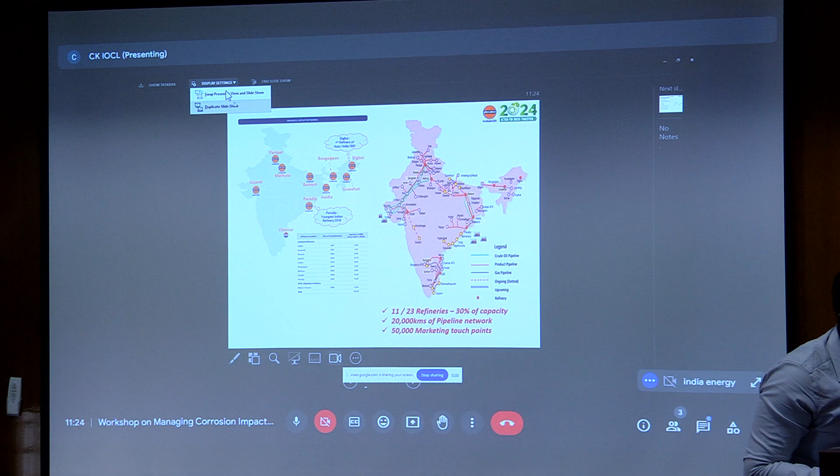Kannan, sorry to bother you, can you make it full screen at your side? It is on full screen only. From the display setting, please go to display setting, on the top left side, second one, it's a display setting. Can you make it full screen? Duplicate. Okay, is it okay now?

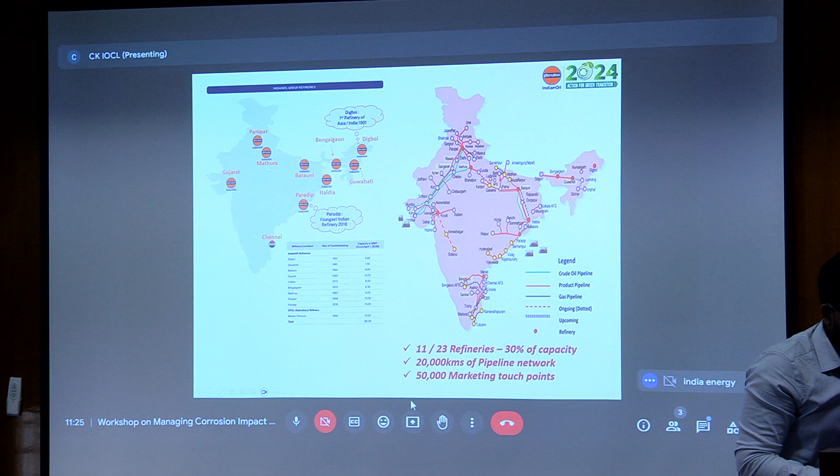Great, now you can also hide it, the one at the bottom you see there. Oh, it's gone. Okay, please go back again. Ignore that. Is it okay now, sir? Thank you, yeah, thank you.

We are the largest refiners in the country, faced with the challenge of operating refineries as old as 120 years. We have a refinery at Digboi, which was installed in 1901, and the latest one in 2016. That is the kind of diverse infrastructure we need to maintain.

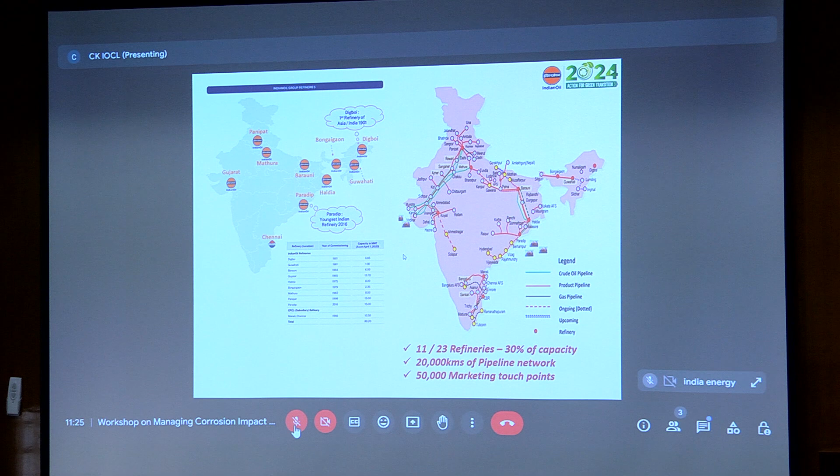At the same time, we also have the largest length of liquid pipelines, underground buried pipelines, almost 20,000 kilometers running crisscross across the country.

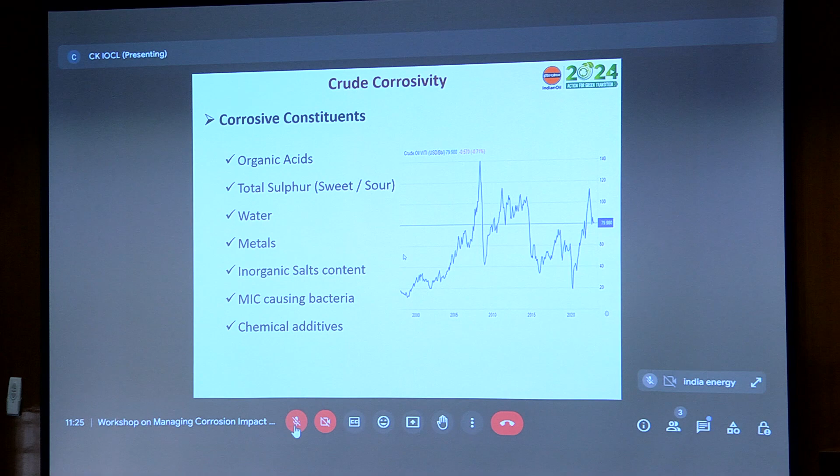As you all know, crude corrosivity depends mainly on organic acids and the amount of sulfur present, along with water and other inorganic salts that come with the crude, which poses a challenge for the downstream oil refining industry, either during transportation through pipelines or during processing in refineries.

You will appreciate that there is a drastic change in crude chemistry, especially the composition for which the infrastructure was originally designed versus the currently prevailing composition. This is mainly with respect to the high total acid number of the crudes as well as high sulfur content. The transportability in existing pipelines suffers because of the very high sulfur crude we tend to transport in recent times. So the question here is the compatibility of existing materials with this change in crude chemistry.

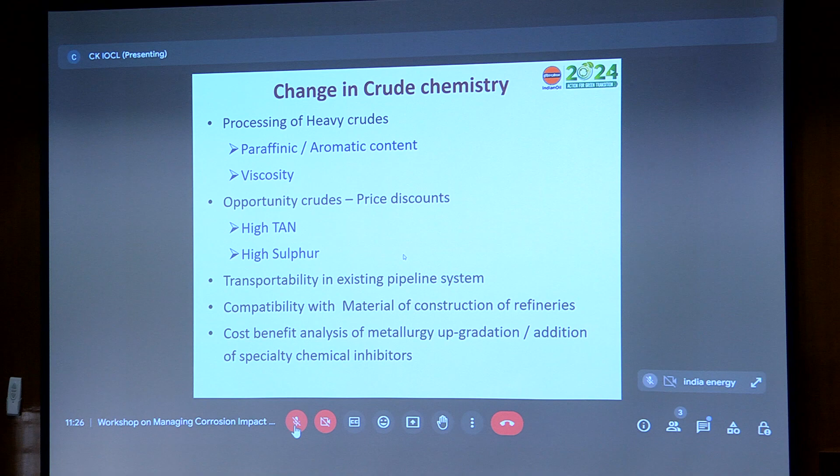On the other side, there are a lot of bottom-of-the-barrel technologies demanded to derive value out of each drop of crude oil we process, resulting in increased temperature, pressure, and severity of processing in the refinery infrastructure.

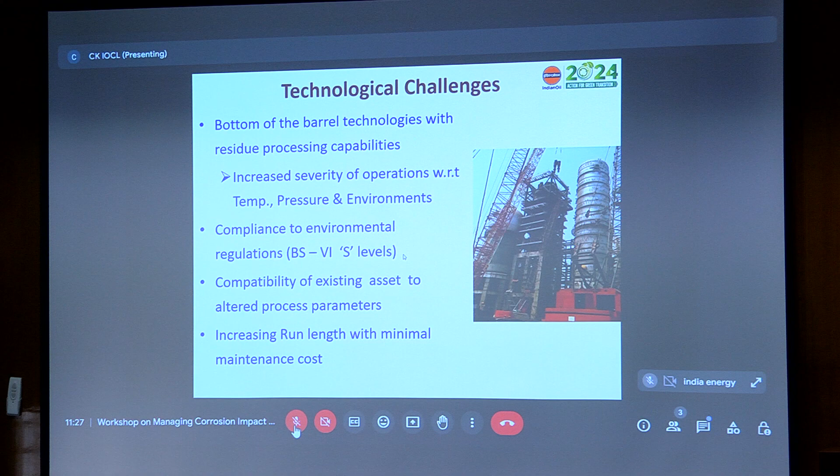And on the other side, there is regulatory compliance we need to meet. Right now it's at 10 ppm, and tomorrow it's definitely going to go down to less than 10 ppm, demanding very deep desulfurization of most of the products that we make.

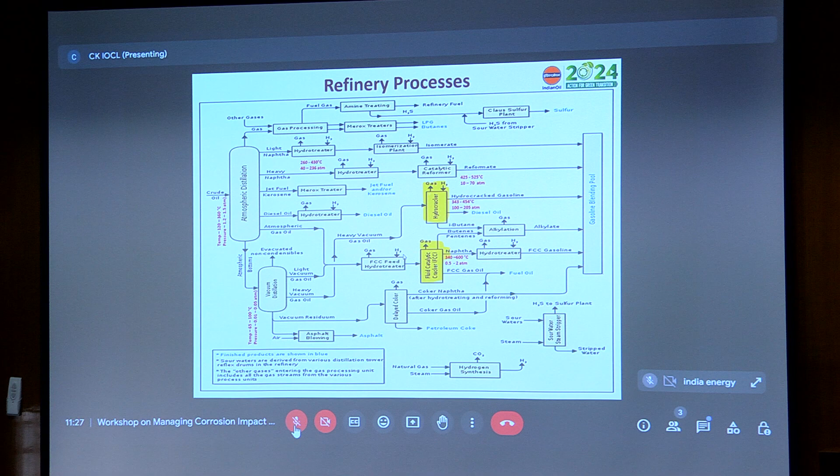As far as asset integrity management of a refinery of the magnitude of IOC with widespread, 100-odd year old assets is concerned, there are systems to be put in place to accomplish that. Unit level inspection: every refinery has its own inspection team which takes care of the assets then and there, for failures or repairs.

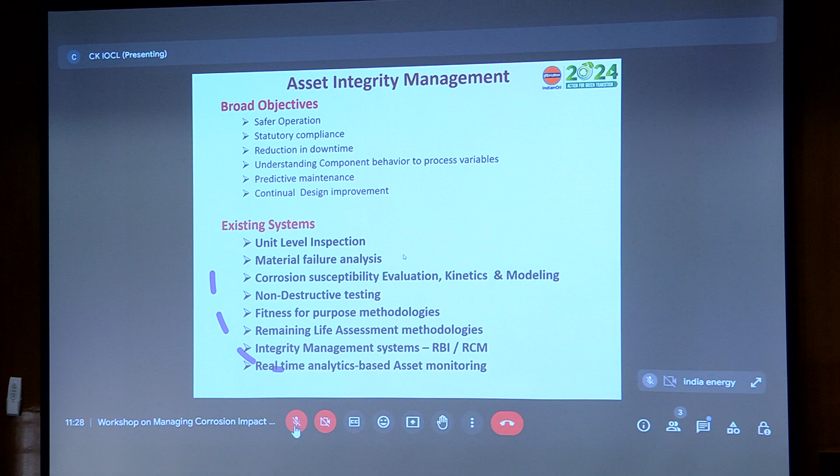But an R&D center like IOC R&D is required more for conducting detailed failure investigation and giving suggestive remedial action so the failure does not recur. In addition, there are long-term activities taken up at R&D, like corrosion susceptibility evaluation, kinetics evaluation, modeling, developing advanced non-destructive testing tools, fitness for purpose assessment for any given service, and remaining life assessment methodologies for operating old infrastructure. I'll give you an overview of each of these activities quickly.

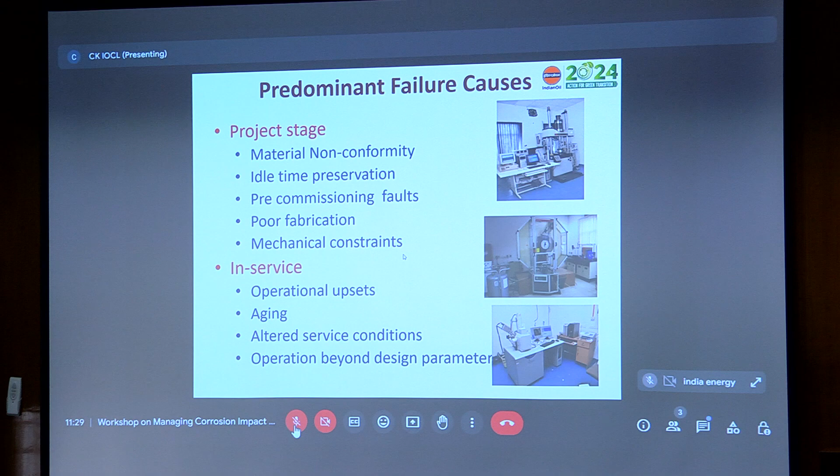The failure cases - in-service as well as project stage failures we face - there are n number of failures that we face. An operating period of 100 years has provided a lot of failure compendium, which is very handy for upcoming refineries as well as existing refineries.

This is something I tend to show in every conference - the impact of failure. On the right hand side is a pressure vessel which took the toll of around 7 people in a refinery, our own refinery. Sad to say, but that is the implication of any failure you can expect.

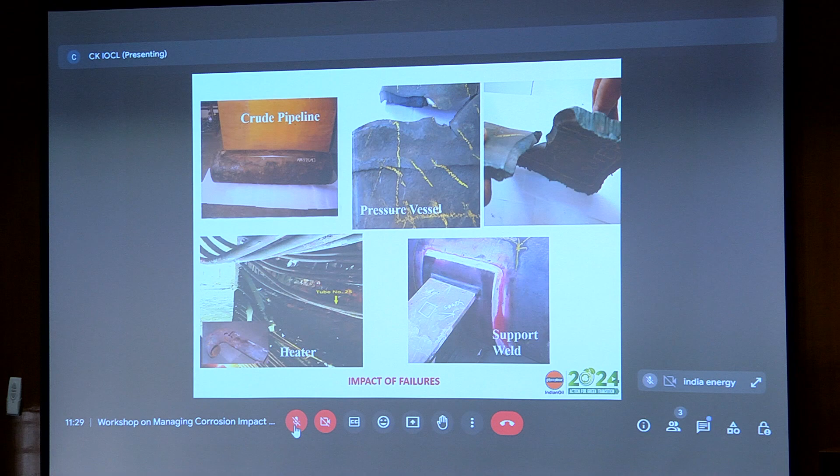On the left hand side, you see a crude pipeline whose leakage inundated a huge area of standing crop with crude oil. On the bottom left, a simple erosion failure caused complete decimation of the asset in no time. That is the kind of impact a failure results in an operating refinery.

This is a collage of many of the failure cases that we have dealt with, and over time we have learned from these failures and corrective actions have been put in place.

One of them is the hydrogen blistering that we see on the middle left-hand side of the slide, which is a result of pumping more and more high sulfur crude in our cross-country pipeline. You can see the lamination present in the pipeline has given a place for hydrogen to accumulate and result in a kind of bulge.

On the top left-hand side, you see naphthenic acid corrosion. With more and more high TAN crude that we process, most of these furnace bends are susceptible to high TAN corrosivity, due to which you can see a small leak of the process fluid.

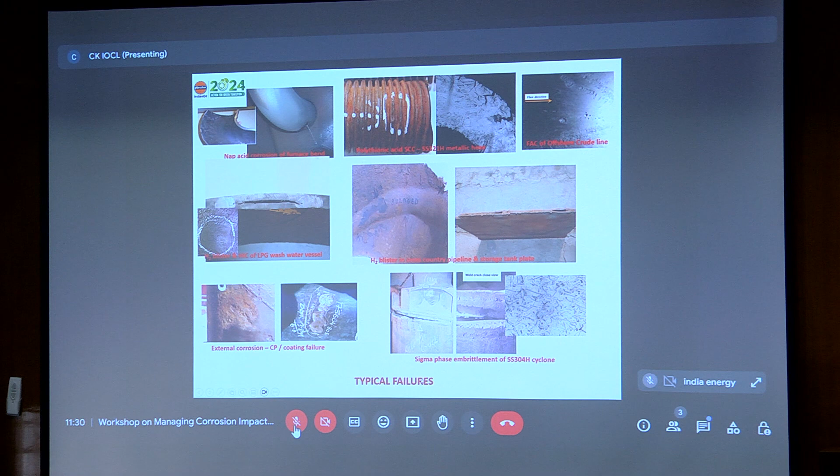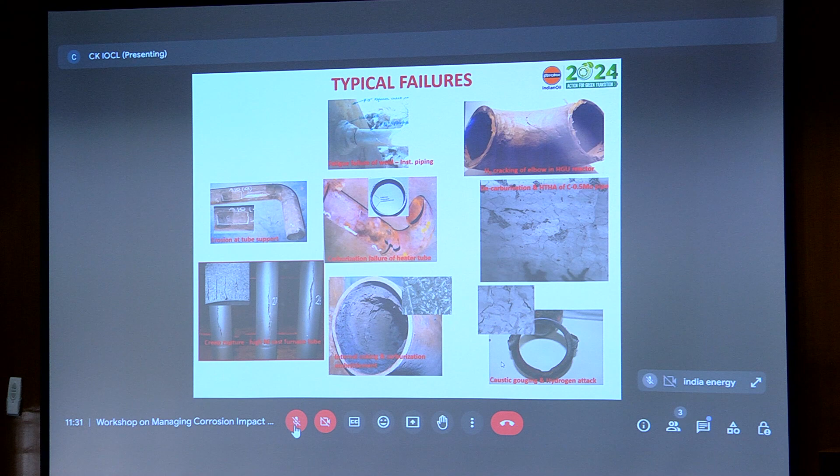I won't go into many of them, because each of these failures has resulted in lessons learned for us - first-hand experience of that particular metallurgy to that particular operating condition. So it's a very good compendium, serving as a very good reference for many of our currently faced issues in refineries.

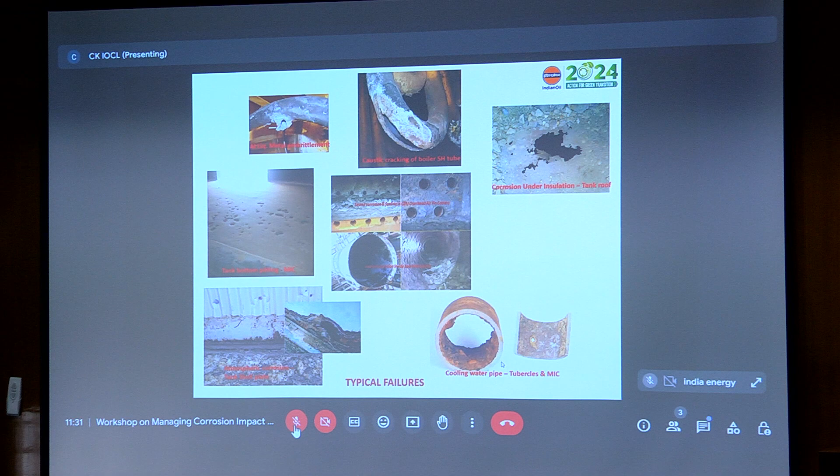The earlier speaker also touched upon microbial influenced corrosion, which is more prevalent in many pipeline systems which use seawater in hydrotest, and subsequently there are low level accumulations of water, stagnant conditions result, and that results in microbial induced corrosion.

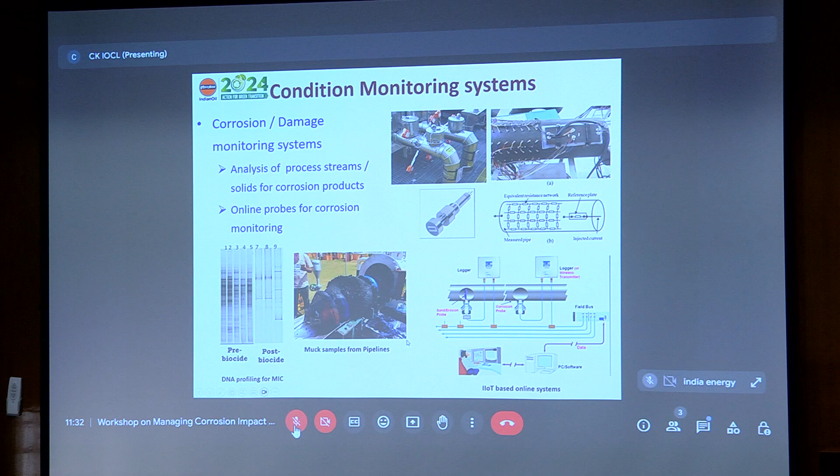So we have developed our own DNA profiling toolkit which we have given to our pipeline division. On a periodic basis, they evaluate the muck collected during cleaning for the presence of MIC, and a preventive action is taken by dosing biocides into such lines where MIC is prevalent.

On the offline and online non-destructive test systems - yes, many systems that have come up worldwide, every refinery worldwide is using, we have also adopted. But more, I would like to stress on some of the NDT which are very critical and very difficult to source from the service provider point of view. So we have taken a conscious call of developing our own tool.

One such tool is the instrumented pipeline inspection gauge. This is completely in-house developed, and right now, as I speak, the entire 22,000 kilometers of liquid pipeline that we have is using only our indigenously developed IPIG tools.

And these tools serve multiple purposes: one is to find out the wastage happening, internal or external corrosion in the pipeline. At the same time, the more prevalent pilferage situation faced in many pipeline sections is also pointed out by this inspection.

Now we are multiplying these tools and using them much more frequently than what OISD specified. On the left hand side you see the crawler, the laser, the EMAT and ECT composite NDT crawler. This is a joint development with IIT Madras, where this crawler can give me the health of reformer tubes, which are centrifugally cast high nickel alloys that suffer from mid-wall fissuring. The prototypes have been evaluated, and now we have started using this for our own in-house inspection.

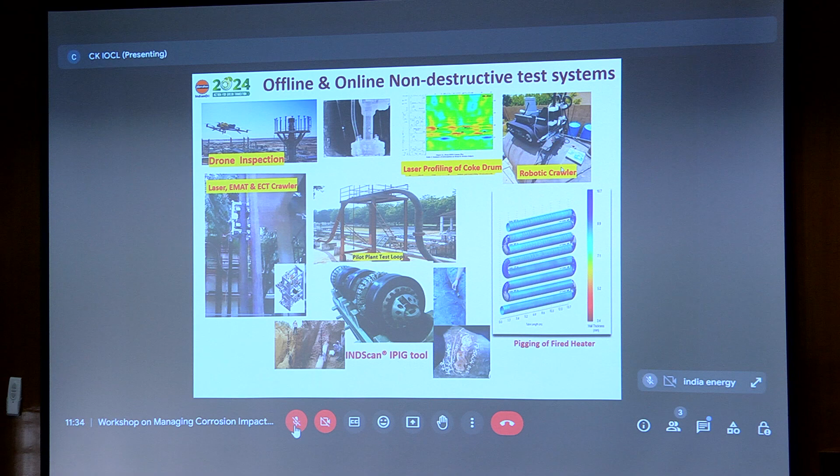Of course, drone-based inspection is coming up in a big way. All the oil refineries are using drone inspection as well as robotic crawlers to have an online assessment of their assets without calling for any shutdown.

Now the important part is design adequacy in altered service. This alteration of service happens on an everyday basis. A very simple example is high sulfur-bearing crude transported in an existing pipeline. So we did the due diligence of the compatibility of existing pipeline systems to transfer very high H2S crude. Hydrogen cracking is what we evaluated, and then we took a conscious call of limiting the H2S limits as far as pumpability of such crude oils is concerned.

An earlier participant had asked about ethanol blended fuel transportation. That was again a very conscious due diligence at IOCL, and we were the first to pump ethanol blended gasoline in a cross-country pipeline. This was taken up after a similar study of the effect of ethanol on weldments, especially what Dr. Sridhar mentioned about stress corrosion cracking aspects. So far, up to E20, 20% ethanol in gasoline, we have done stress corrosion studies, and for most pipelines the weldments are compatible with 20% ethanol. As he rightly pointed out, the amount of water, dissolved oxygen, and methanol impurity contribute most to stress corrosion cracking failures of weldments in pipelines.

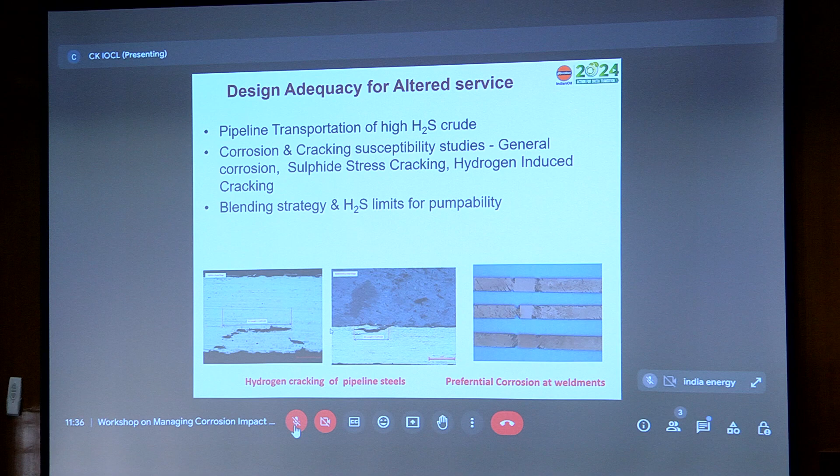Then the kinetics modeling, this was again a joint work with Honeywell. These models have been developed for processing high TAN crude, to see the effect of TAN number along with sulfur content in terms of processing temperature and wall shear stresses prevalent in any given pipeline. The corrosion models have been developed and put to use by IOC in doing blend optimization, so we don't directly process the high TAN crude.

We are taking up to 8 to 10% high TAN crude in our overall crude inventory, and right now there are around 250 crudes that IOCL has in its basket. So when blending high TAN crude, we try to limit the TAN values as per the model prediction, and also maintain sufficient sulfur as a protective layer. These conscious calls can be taken if one does corrosion kinetic modeling, and these models can help limit our operations to some extent and prevent corrosion a priori.

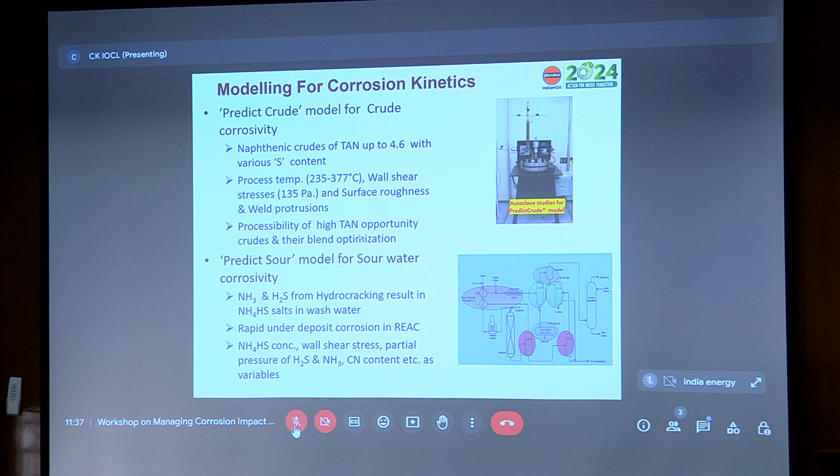The corrosion inhibitors are a very cost-inducive proposition for continuous inhibition in a cross-country pipeline. So we have developed our own indigenous inhibitors, and we are using them both for our product pipelines as well as crude oil pipelines.

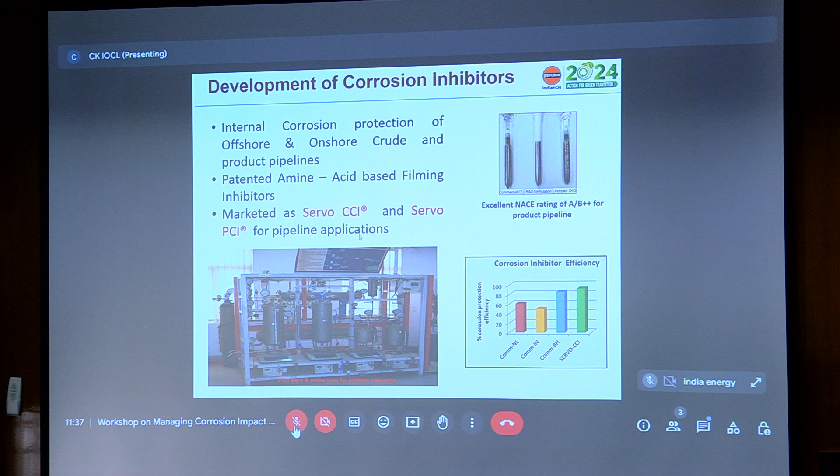The fitness for purpose assessment, in some cases where we see crack or crack-like linear defects, we are left with no option but to continue with these for want of immediate replacement. So to buy time, there has to be conscious decision making in continuing the equipment for a given period till replacements are arranged. We use this engineering critical assessment, using the failure assessment diagram concept as well as BS7910 and API 579 codes. These codes have been successfully used in many applications like LPG storage spheres with leg support cracks, multi-layered hydrogen bullets with cracks, and blistering in an LPG wash water vessel. In all these cases, we used the FFP assessment approach through engineering critical assessment.

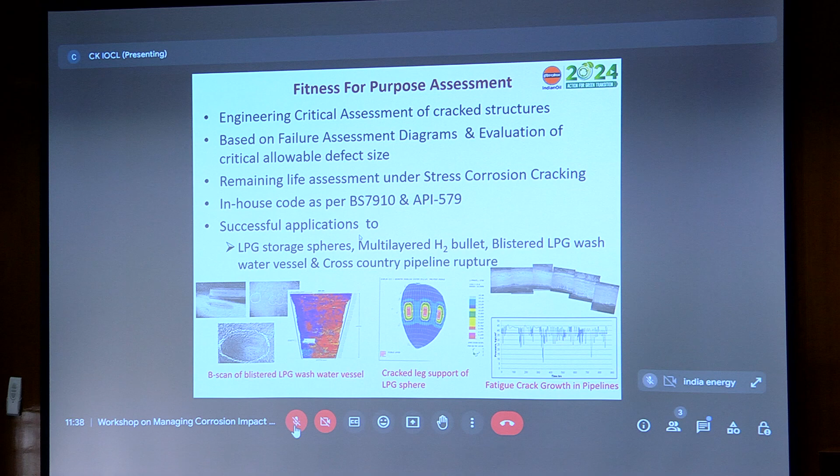On the RLA side, because of the aging of our refineries, there is a lot of infrastructure running beyond 30 years. So we have a very elaborate stress rupture, creep rupture test laboratory, using which we meticulously carry out life assessment procedures based on creep life, expanded creep life, and give recommendations to the refineries about continuing to use those heater tubes or any high temperature tubes suffering from creep.

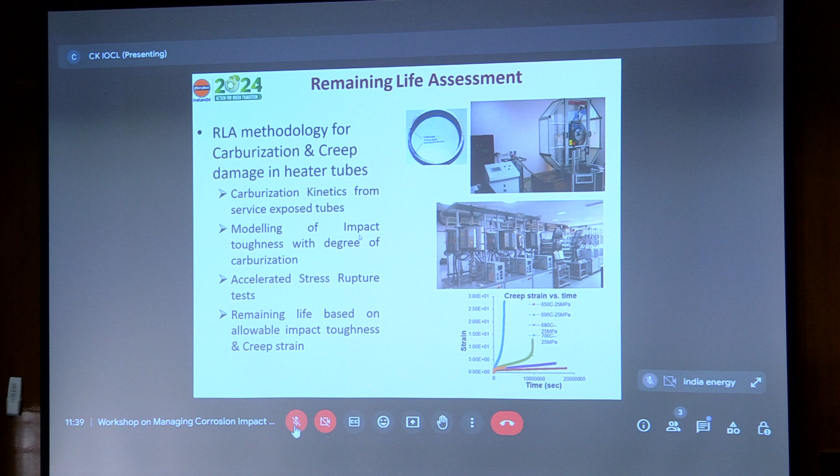So finally, the areas of concern in the present system are the adequacy and effectiveness of the current corrosion management system. There is continuous upgradation taking place; however, systemic changes are required to make it much more effective. We are aware of that.

On the other side, there is also a demand for reduction of maintenance costs associated with the inspection process. So more and more automation is what we are moving into.

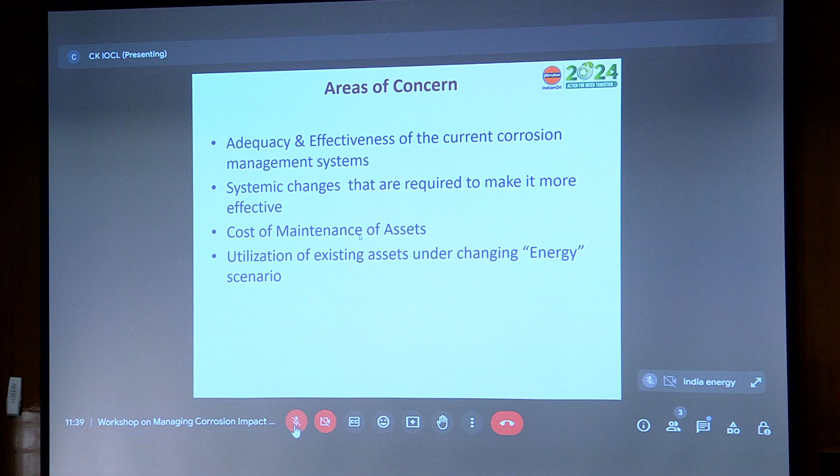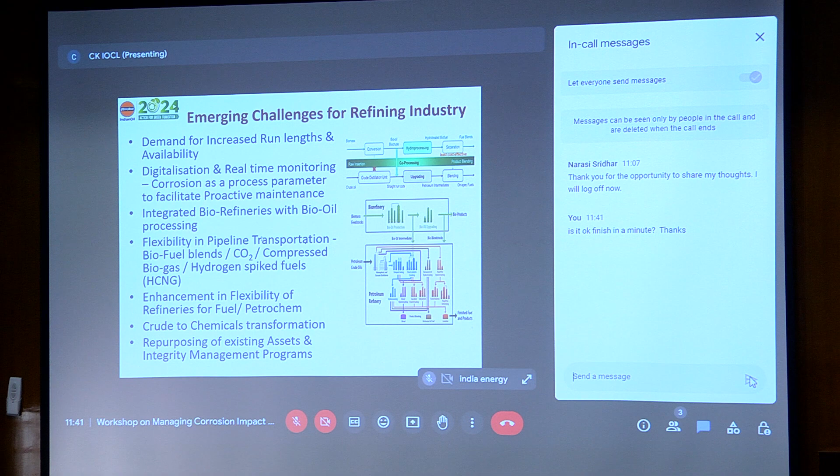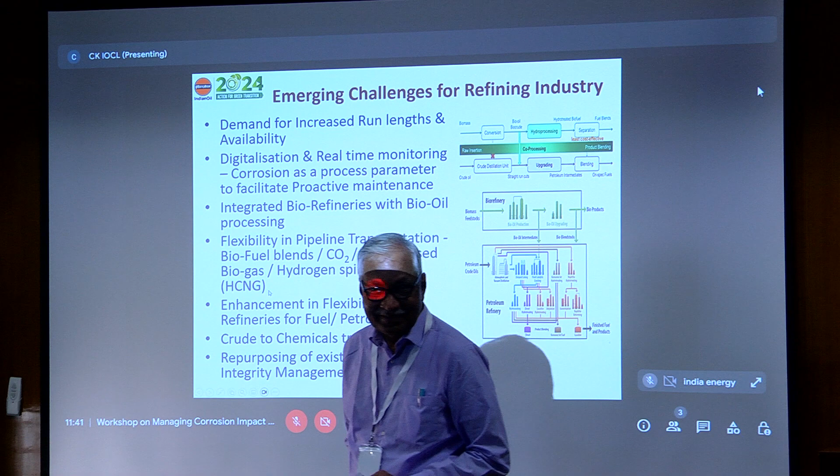This program will pave the way for specifications and acceptance by stakeholders like the governing statutory bodies, basically OISD and PNGRB, to come on board and allow existing gas pipelines to take in some proportion of hydrogen.

The last one is crude to chemical transformation. Every refinery is now looking at staying profitable by having the flexibility of switching between fuels and chemicals as per need. This again poses a lot of challenge, because converting crude to chemical requires operating conditions much more severe than in a conventional fuel-based refinery.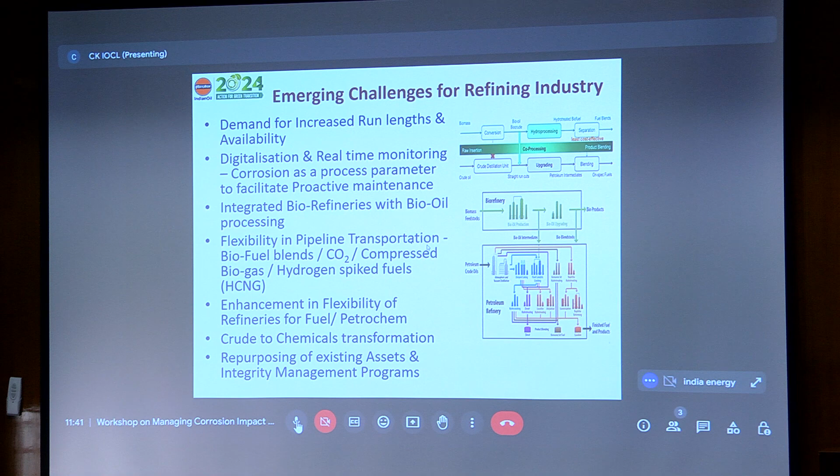As far as metallic materials are concerned, a lot of knowledge exists, and we can extend this knowledge for all the upcoming challenges I mentioned for refineries. But there is a separate set of non-compatible elastomeric components to consider.

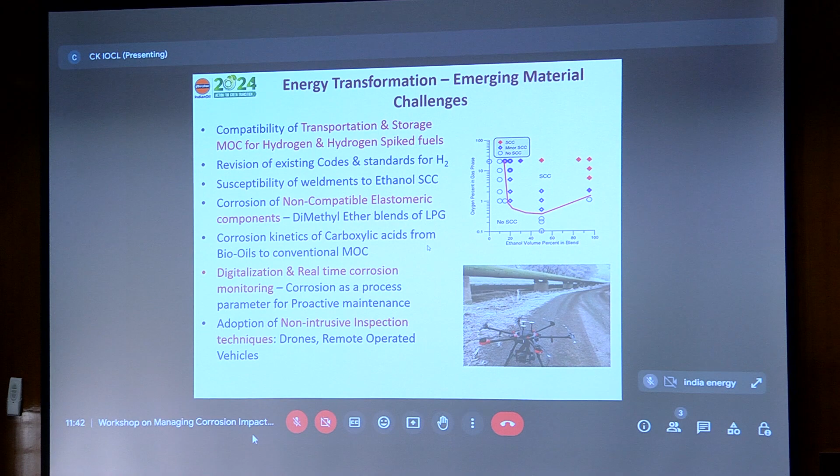Today, no fuel is pure. We have ethanol blended in gasoline, methanol blended in diesel, and DME blended in LPG. That is one way of achieving decarbonization of the entire fuel spectrum. But this opens up a separate set of understanding needed regarding the compatibility of elastomeric components used in many processing units, be it a simple storage system, transportation system, or systems prevalent in domestic applications.

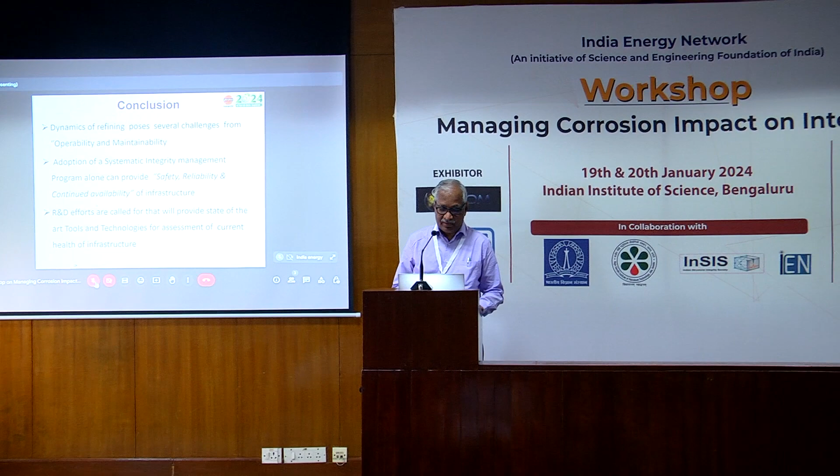So finally, I would say there are many upcoming challenges, and these challenges definitely have to be met with conscious R&D efforts. Thank you very much.

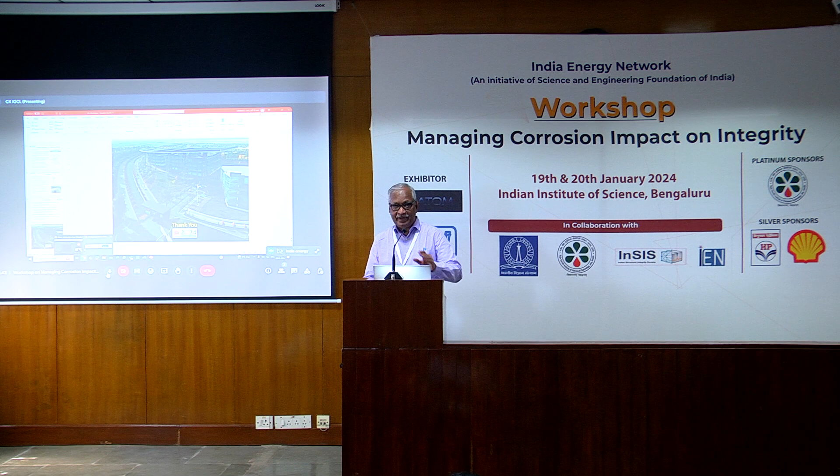Okay, so thank you, Dr. Kannan. It's really a very comprehensive presentation of various corrosion problems faced by a typical refinery. I know it's a very interesting topic. I think maybe we can take one question.

Myself is Santosh Haprao, NTPC. It came to my notice that IOCL has taken some corrective measures in handling firefighting corrosion, related to corrosion mitigation of the pipelines involved in firefighting. What kind of mitigation measures do you normally employ in those pipelines used for firefighting?

I don't know whether I could really answer that fully. In firefighting lines, the most prevalent issue is MIC, because of stagnant conditions. So you need to avoid stagnant conditions in the firefighting line as far as internal corrosion is concerned. On external corrosion, yes, there are a lot of coatings which we use. I don't see anything more than that in firefighting systems.

Yeah, I agree with you. I know it's a very interesting topic, and there are many people who would like to ask you questions. Maybe I'll ask the organizer to share your email ID so that they can contact you offline.